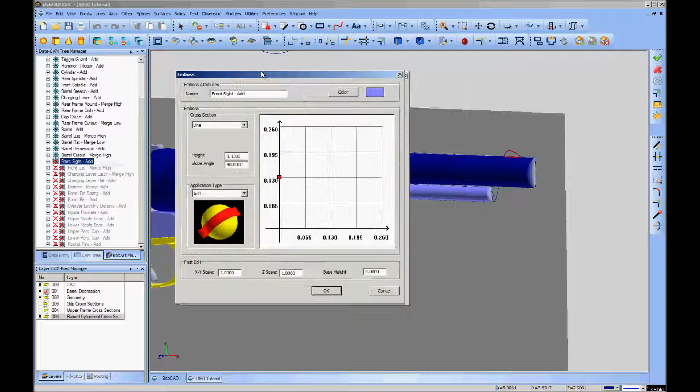This is the front sight. It's a straight line add emboss. I've got a line 0.13 high, 90 degrees, so it's a straight vertical line. I've got my geometry picked, and when we regenerate the model,

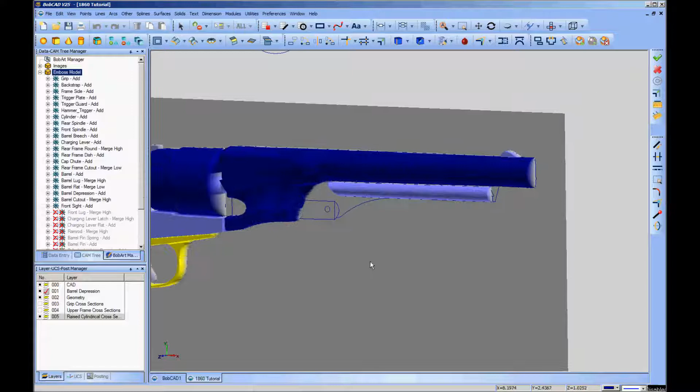you'll get to see what it looks like. One thing I've noticed is that the videos don't really do a very good job of letting you see this. Anytime I move it, they pretty much mess up. So I'm going to blank and then unblank this model, and I'm not going to move for the next few embosses. Hopefully that'll give you a little bit clearer view.

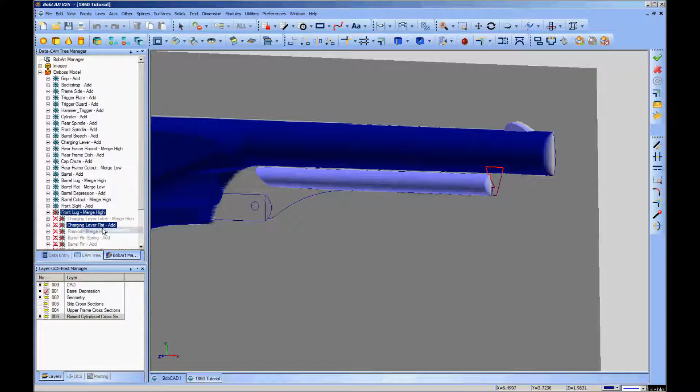So there you see the front sight. Next we're going to do this lug at the bottom of the barrel. I'll unsuppress it, bring it up and edit.

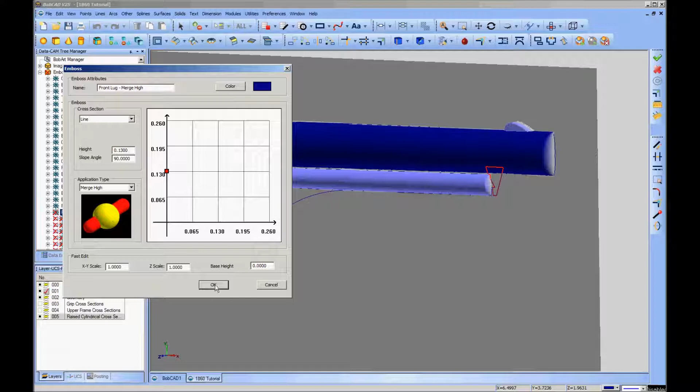It is another straight line emboss, 0.13, 90 degrees. It is set to merge high because it crosses onto this other emboss, as you see. And because of that crossover, if I left it a straight add, it would jump up and give a different surface contour where it impinges on the barrel. So I set it to merge high. Got the color to it, and when we regenerate, you'll see that piece.

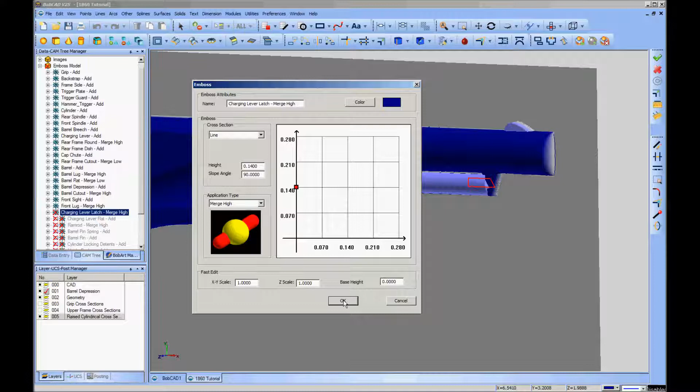Next we've got the latch here for the charging lever. It is another case where it crosses over from where it sits on top of the cylinder here, crosses over to meet the lug. So again, I've got merge high set as my type. This is another straight vertical line, 90 degrees slope, and 0.14 is the height on the line. Regenerating, and we'll see this one. I made a slight difference in height between these two to give a little bit of definition to that.

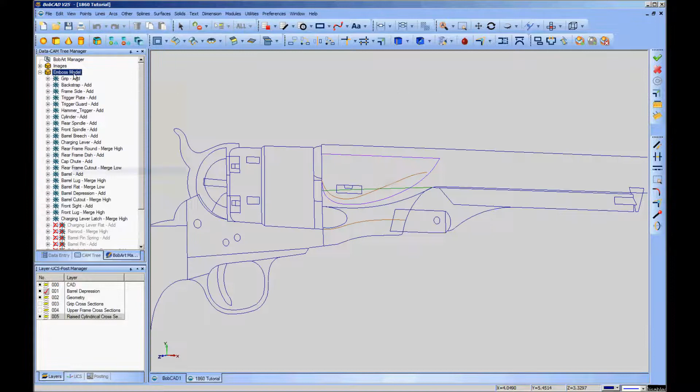Moving back, and I'll blank this so you can see it better. Next we've got this flat part of the forging that comprises the charging lever. We'll unsuppress and show you that it is, once again, and this is the reason that I'm going through these very quickly.

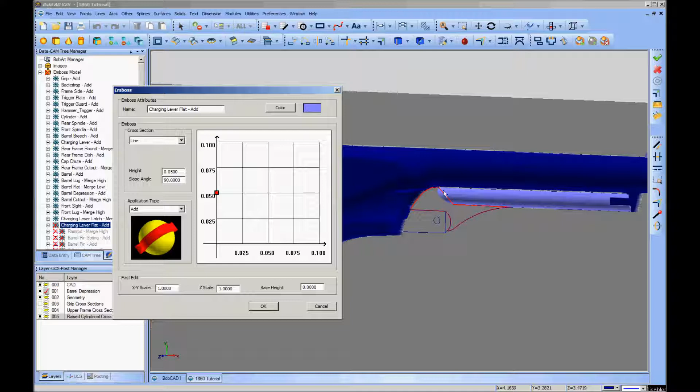These are very simple embosses. If you've gotten this far in the tutorial, these are pretty much no-brainers, and so it's why I'm speeding up here, to save a little time and get these moved on out of the way. This one is 5/100 straight vertical line emboss, just an add because it does not cross over anything else. If this were set to view from straight above, you wouldn't see an impingement there. It doesn't actually cross onto this embossment. So we'll regenerate that.

Now this piece is a cylinder with a rounded end. I didn't do a two-rail sweep as I've done with a lot of the other cylinders because of that rounded end. I would have had to add that on, and I was able to get it all in one shot by using a standard emboss. First I'll unsuppress that, then bring it up.

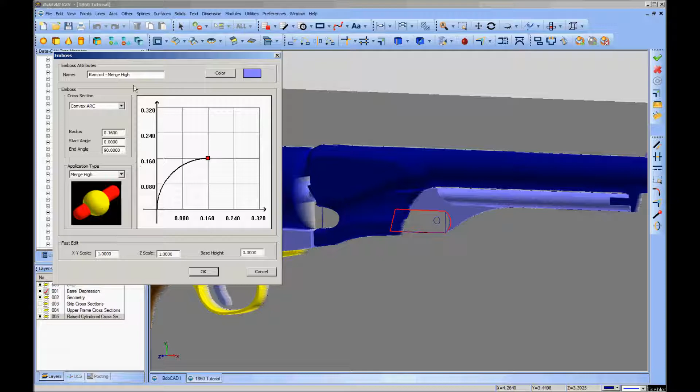A standard emboss with a convex arc, basically a semicircle, 0 to 90 degree angles, and at half of the distance between these two lines is 0.16. So the diameter would be 0.32. Bring that up with a merge high because it does impinge on the barrel lug here, and we can get that all in one shot. I believe I've gone over all the stuff there, so we'll let that be. Regenerate.

And there you see it. Now we'll move back to what, there's really one more feature and then we'll get to the cylinder, and that is the pin. Let me bring this up to the top view.

The barrel latching pin, and again I'll blank and unblank so that it shows up in the video. It's an artifact of the transcoding that's pretty annoying, but we'll try to get around it as best we can. A rectangular pin that goes through a hole in this rod that the cylinder spins on that secures the barrel to the frame assembly. There's a couple of locating pins down here at the bottom, and then the pin there, and that references everything and keeps it locked up tight. So first we've got, let's

Suppress that. We've got a little spring that's part of the pin. That's a retaining spring that once the pin is in keeps it from going anywhere. And on this one we're just doing an additive emboss, just a convex arc with 2/100ths of radius. It's just enough to give it a little definition is all.

I'm not going very much relief on these pins. They just basically have to be there. That all looks good, so we'll go ahead and regenerate that one.

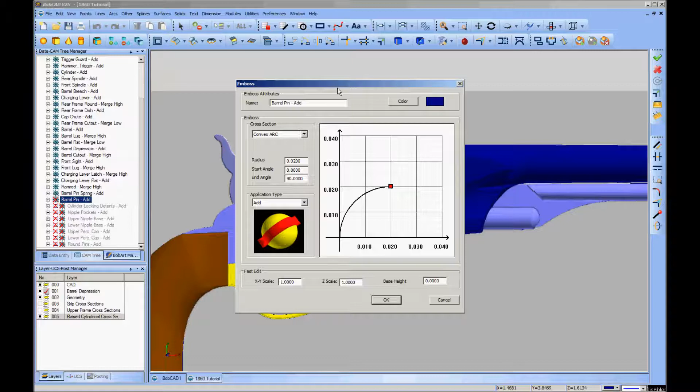And the next part is the actual pin. Unsuppress that and bring it up here. The exact same settings. It's a convex arc with 2/100ths of radius, straight up semicircle. Because these two, here's the little spring, share a line of geometry there, they actually stack one on top of the other, which works to the advantage because that brings the little spring out into some definition once we regenerate.

There you go. Probably difficult to see, but the pin actually protrudes, or the spring actually protrudes just a tad more than the pin. That works to our advantage. It looks pretty nice. Alright, next we have two features that are both indentions into the cylinder here.

The first is the locking detents. Unsuppress those and bring up the edit window. These are vertical line drops. Basically they are 90-degree lines that drop in 5/100ths just straight down. They don't go in toward the axis of the cylinder, which that's too bad, but it's not really that big an issue in this case.

I've got a darker blue selected to show them off, and so we'll go ahead and do these. They are features that at the very bottom here there's a spring-loaded pin that during the cocking action it pops up, engages one of these detents when it's dead center on the bottom, and it locks the cylinder with the chamber directly lined up with the barrel.

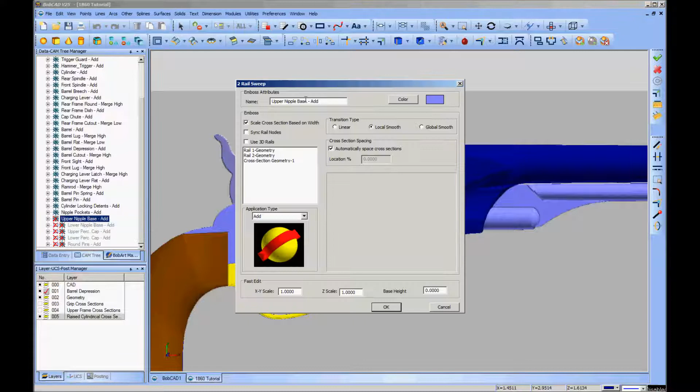Alright, the only things we've got left are the percussion nipples, the percussion caps, and the pins. Because I have to do the percussion nipples as two rail sweeps, I was not able to do multiple features. You saw earlier the feature for the detents got both of these, the feature for these pockets got both of them. On these guys I had to run just one at a time.

So they are basically cylindrical or semi-cylindrical. The cross section is our old standby semicircle. We've got a rail, and then our cross section. And I'm going to go ahead and do both of these features at the same time because it's all really the same thing.

You've got the base of the percussion nipple, then a little bit farther out you see these lines show up, and this is the actual percussion cap, which has a different color. But with both of those unsuppressed, we regenerate, and you see what I've got here. I'll turn this in a moment. You can see that it's actually a semicircle, but that's the next to last features.

Let me unsuppress these other two. And I'm not even going to talk about them because it's the exact same thing, just that the geometry is down here. The last thing we've got is our round pins. We've got one here that attaches the ramrod to the charging lever, and we've got 3 that are in the frame.

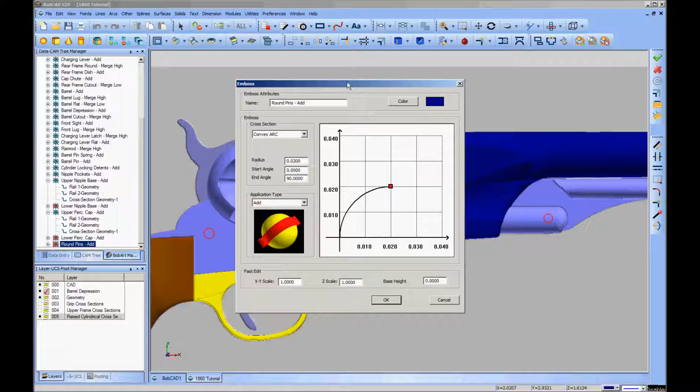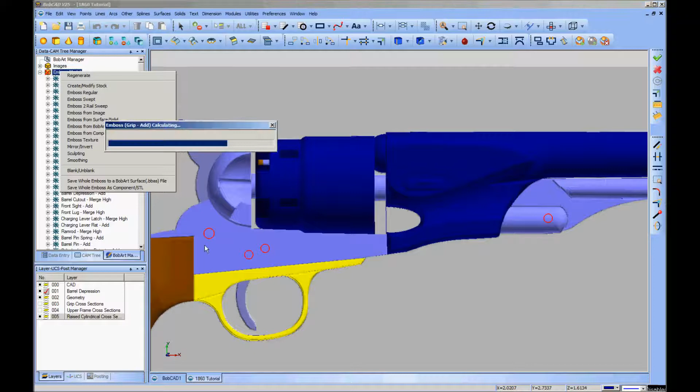On these, I've just got a convex arc, straight additive emboss, 2/100ths of radius, and that's really all there is to it. That's just to give them enough definition to pop up off the frame and to be felt and seen, since they're different colors here. And we will go ahead and regenerate, and there is the entire emboss. Bring it up to a top view, and immediately pull it off of the top view.

I'll drop off the emboss and then unblank it so that you get a good look at it.

Alright, the next thing I'm going to do is bring up a sculpting feature. I'm going to work on the little crease right here. I've got a high spot right back here, and there's also one right there at the edge. I want to fill in a little bit there, and I need to smooth out this handle.

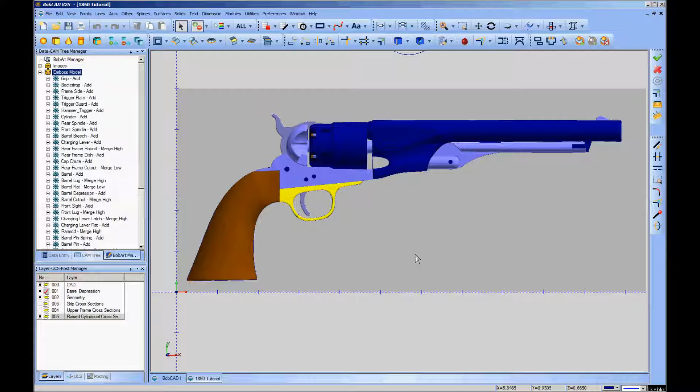So I'm going to use probably 2 to 3 sculpting features. First thing I'm going to do is save the file, and then I'll spend some time on the sculpting features because it's one thing we haven't gotten into at all yet, and it's a marvelously useful feature, but it's also fairly complex and not terribly intuitive.

So we'll start off by deciding where we want the sculpting feature in the tree here. We want it to work on the things we want it to work on and not touch anything else. In this case, I've got the barrel, the lug, the flat, and this indentation all put together right up here, and then down to the cutout, which is this part right here. I don't want this touched, and I don't want either of these parts touched. So right between these two is where I want to put the sculpting feature.

So we'll bring up a sculpting feature and just hit OK. It's right there. Now we drag it up to, yep, there we go. That's between the barrel depression and the barrel cutout. That's exactly where I want it. It'll work on everything before it, but it won't touch anything after it in the tree, and everything right around there is the parts I want to work on.

So we're done with geometry. I'll turn that off. Now at this point, we go ahead and bring the sculpting feature back up by hitting edit.

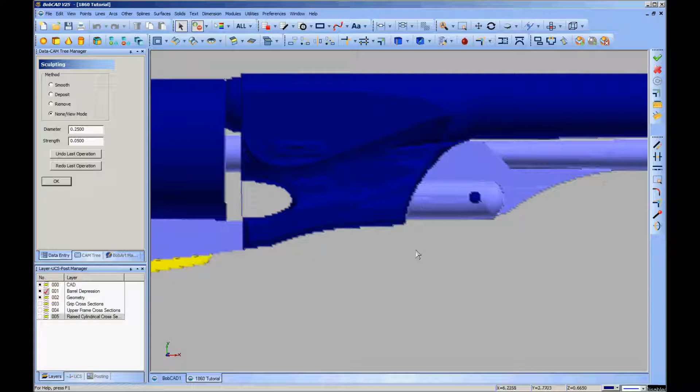First thing you'll notice is that the resolution drops precipitously. Don't know why that is, but it's something that BobCAD does when you bring the sculpting feature up.

Go over the various modes. Smooth is an averaging feature. You've got a low spot right there and a high spot on either side. When you drag your brush across it with smoothing, it tries to average those all together, so it'll lower the highs and raise the lows. You can consider it almost like a file or a grinder, except that it does kind of smush things around too, so it's got some properties of modeling clay or forging to it.

Deposit basically lays down material, and here's the brush, by the way. I'll go ahead and size it. It's set to 1/4 inch. We'll size it down to, say, 3/100ths here. That's about the right size for this.

Deposit will lay down a bit of material here, or basically raise the level of the emboss wherever you ring it. And remove does the exact opposite - it'll dig a trench or put a dimple in where you single click it.

And then it's got a view mode. Diameter is in inches, so the same size brush, if you zoom out, will lay down exactly the same size as when you zoom in. It'll always be 0.03 inches if that's what you've got it set to.

Strength defaults to 0.05. I generally use that as a maximum and back off considerably, down to as low as 0.01, to get a more subtle effect. What we're going to be doing here, if you've ever done any welding and filled a hole with the welder and used a grinder to smooth it out, then added a little more and smoothed it out again, that's exactly what we're doing here.

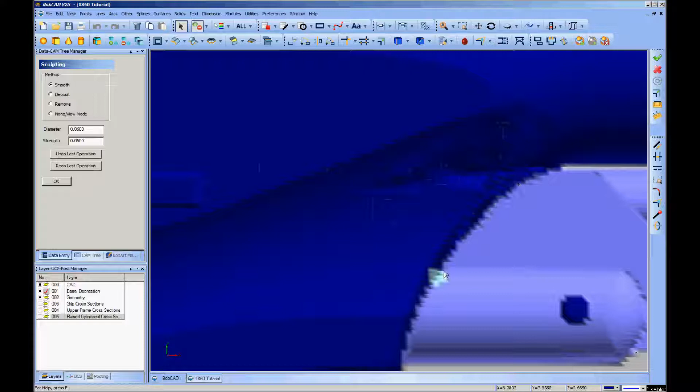You want to try to be careful when you get to the edges of material, because it'll bleed over onto your other emboss. That's one of the reasons that I was so careful to place this sculpting feature before all these embosses, but after these up here. If it bleeds over, then these embosses will just slap down and cover what it bled over, hopefully. That's the theory anyway.

Okay. So you can see that I'm still running more or less along the contours and doing my best to just smooth things down as nicely as I can without affecting the areas that aren't really just immediately adjacent to this.

I've still got a little bit of a pit right there. I'm going to leave my brush size the same, but slack the strength way off. And lay kind of a low flat bead right there. I'll make that 2 of them. Then go back up to smooth, increase my power. And basically smudge all that in there.

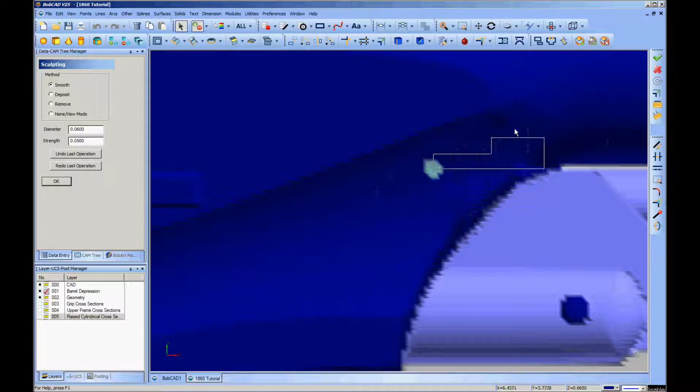If you like to use the analogy of clay and a thumb, that really is closer to what's going on than the welding analogy, but I've got a background in both, and I tend to just kind of mix metaphors and butcher the language all over the place. Okay, I think that's pretty close.

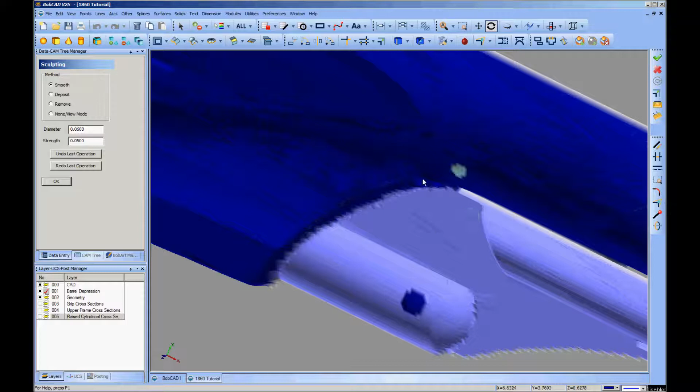I'm going to go ahead and tilt this. It'll make things look pretty bad for you guys, but it lets me see what's going on, then I'll try to bring it together. Right in that area there's a little high spot. Right down there there's a little high spot. I'm going to go back to a top view, and that brings up actually a good point. The sculpting tool only works top down.

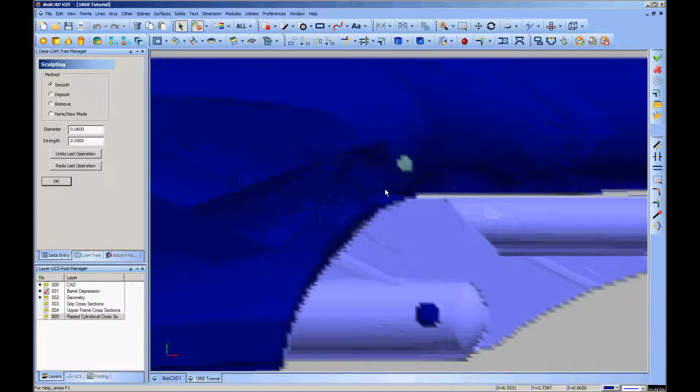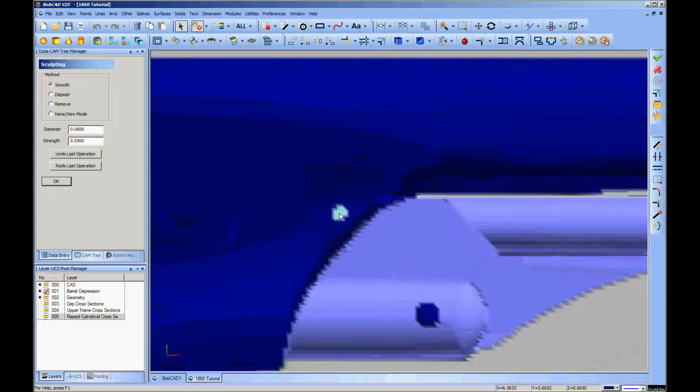It's the only time that your mouse pointer is in agreement with the round cursor there. If you tilt it off to the side, which I'll do, notice how there is no more agreement between my mouse cursor and the pointer. The mouse cursor is way over here, the pointer is way over there, and you just can't get them together. And that can cause real issues, believe me. Found that out the hard way. So always, before you start clicking on anything in sculpting, go to your top view.

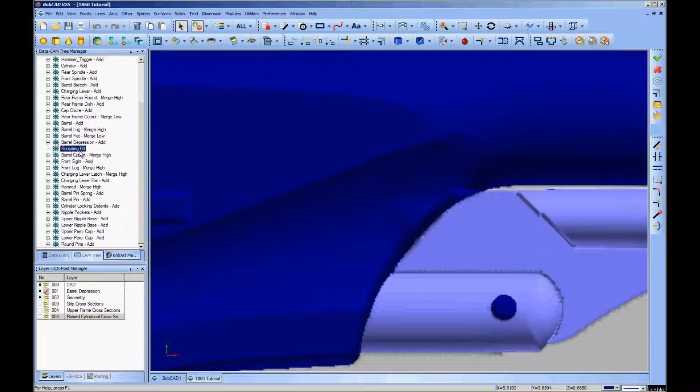First thing I'm going to do is tell that okay, and I'm going to try and give you folks a little bit better view by going back there. Now I'm going to edit my sculpting mode again. Of course that drops the resolution again. I'm going to drop the brush size back down to 0.03 and the strength to 0.03. Bring up my remove tool, and as I said, I've got a little bit of a high spot, a little bit bigger high spot actually, right there.

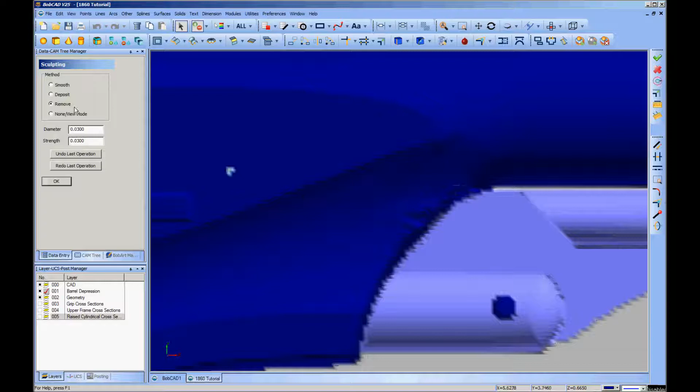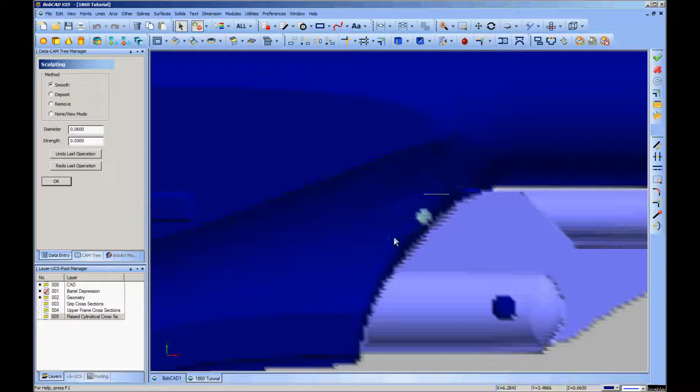So first, I'll just dig a little bit of material out there. I'm going to dig a little bit out right there. And then I'm going to bump my brush size back up and increase my strength. Go to a smoothing tool. Okay. Now, I might work on that a little bit more, but everything that I would do, you've just seen done, so I'm going to move back to a different area with a slightly different problem.

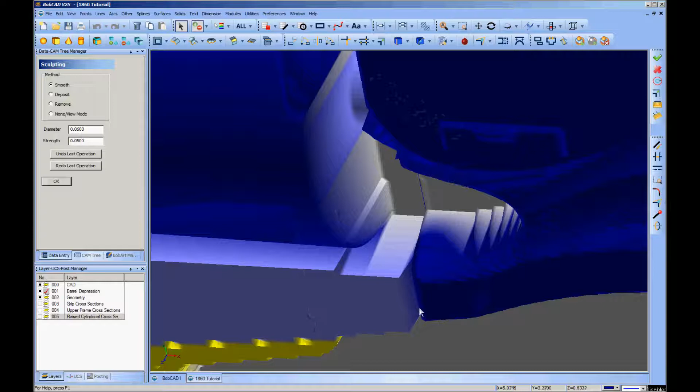It's going to be difficult for you to see. That's probably the best view of it. There's a little flange of basically high ground right there that I think might be a little bit too much for the overall smoothing pass that I'll put at the end. Might not flatten that enough, I think. I've also got a little bit of a valley to try to fill down here. It's not going to be easy to do, and I may have to leave that. So let me bring it back to a top view. I want to bring up my remove tool, drop my brush size, and drop my strength.

In the actual pistol, this is heavily radiused under here, so if I leave a big shadow of material that's been taken out, that's really okay. It'll look alright. So I think that's going to be pretty close. I'm going to increase the size again, increase the strength again, go to smooth, and just round that out as best I can. I don't want to get onto these contours here very much because I want to leave them as defined as possible. I don't really want to get off the reservation much at all there.

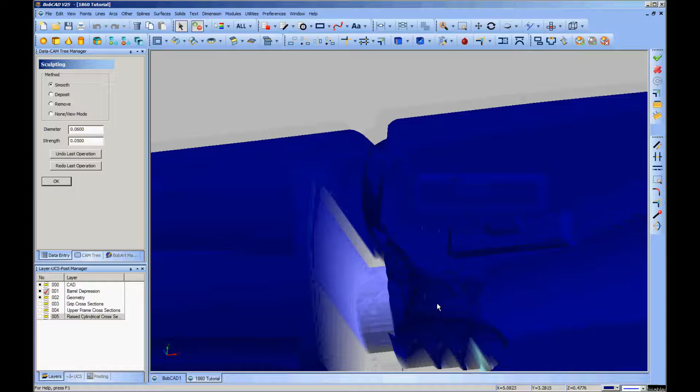Alright, let's see how that looks. Tilt it up. Alright, we've got a little spike there, a little spike down there. Those I think will get taken care of by the smoothing pass. But I'll try one more little hit on them. Alright, I'm on remove. And I'm going to just go to smooth with those settings. And do a little bit of work. Yep, that took care of it. Go back to top view.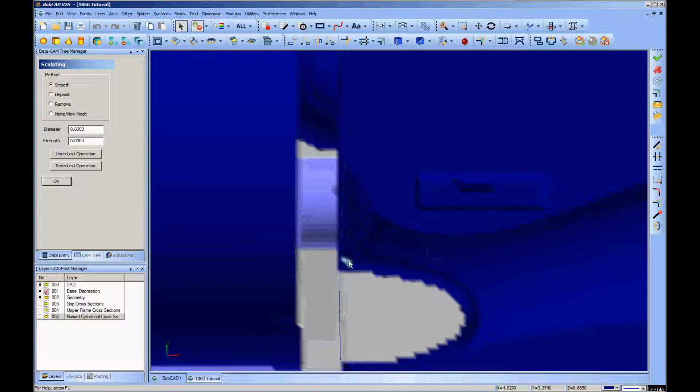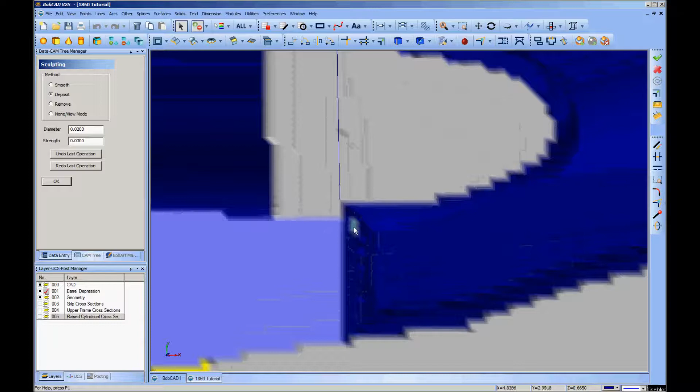Alright, the last minor area I've got is this indent right here. I wanted a rounded edge on the barrel lug, but because I did that as a regular emboss, that also gave me a rounded edge here where they should join up. Clicking over to deposit, I'm going to decrease quite a bit on the brush size and try to get into the valley. It tends to try to drop the material on the nearest flat if it's anywhere close to your cursor. So we'll see how well I can do this. Okay, that's better than I thought I'd be able to do. It's actually not very bad at all.

Go back to top view so I don't get out of whack here. I'm going to drop my brush size even smaller. Make a smoothing pass or two, and then see if I can deposit just a little bit more into this hole.

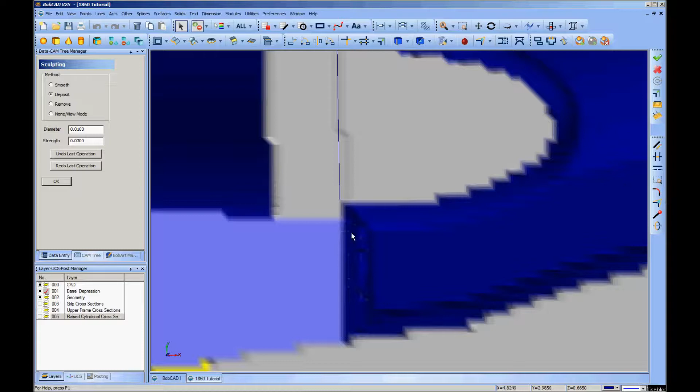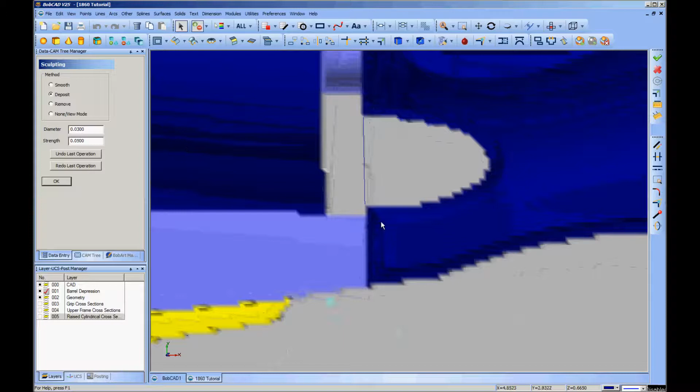Alright, I think I'm probably close to as good as I'm going to get there. I'm going to jack my brush size back up a bit, to say 3. Give myself some power and smooth this a little bit.

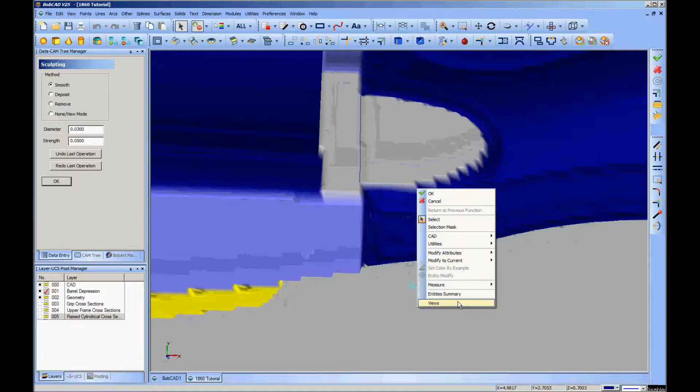Okay. Probably not going to be able to do a whole lot better than that. In a circumstance where that was a real issue, and it might be once I've got this on the machine getting ready to cut it, you could always go back in and just make a little small square feature that would fit in there and would fill that. And not really very difficult to do, not very conceptually challenging, so I'm not going to bother with it right now.

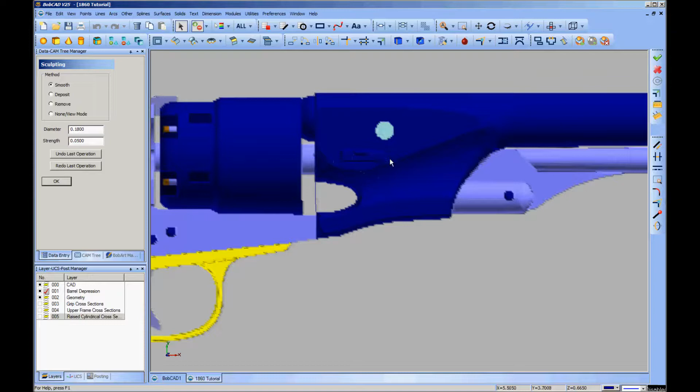I've got one more big smoothing thing to do. Gonna give myself a pretty good sized brush. And we'll go a little bit bigger actually. I'm gonna soften these lines just a little bit. Gonna have to be careful to stay off of the pins here, but bring this down. And I'm just going to move right along the contour.

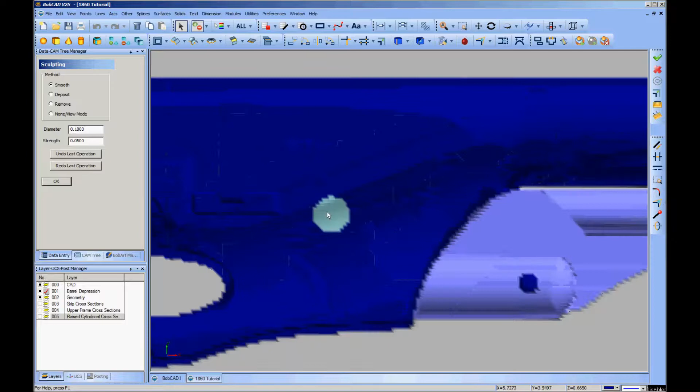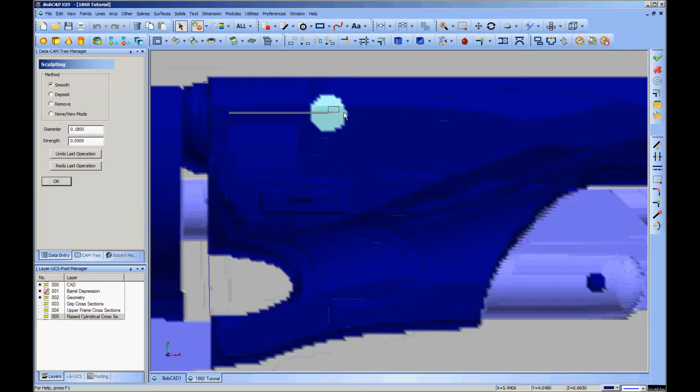That's probably fine on the lower one, except this area in here could stand a little love. I'm just gonna kind of brush that out a little bit. I'm going to do the same thing along the top here, just one quick pass. I am going to fade it out a little bit up front here because it really did lose a lot of definition on the actual image. You could barely tell where the line went when it got to the forward part, the top line at least.

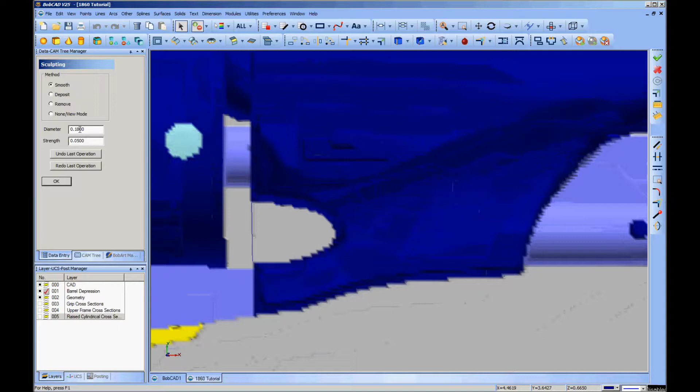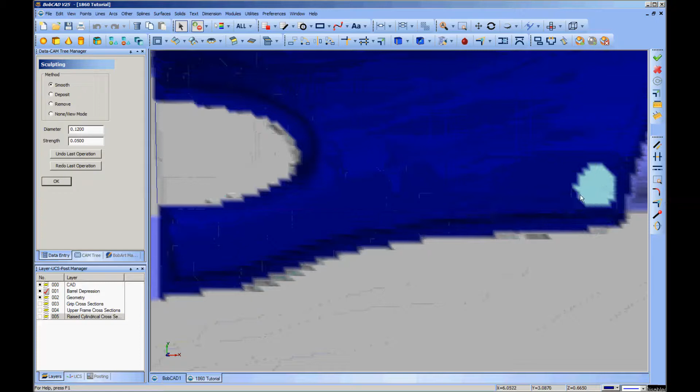And I'm going to step down just a little bit in size, and I'm going to do the same with this bottom chamfer. Going to just wipe all around. Maybe do it twice on this very bottom feature. And then a quick pass across there. Okay. I'm going to call that barrel substantially done.

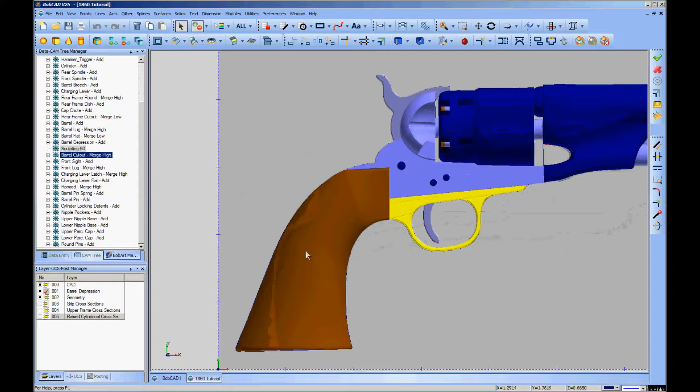I'm just going to use the same sculpting pass because there's really only one other thing on the whole piece that I want to do, and that is blend this line in a little bit. So we'll bring the sculpting feature back up. I've got a 1/8 inch full power smooth, so I'm going to go across contour here to just kind of rub this line right out.

And if you're wondering what those little rectangular artifacts on the screen are, so am I. I think they're a little borderline glitch; it's just visual as far as I know. It doesn't indicate that anything's going to crash. They just pop up when they want to and then leave you high and dry.

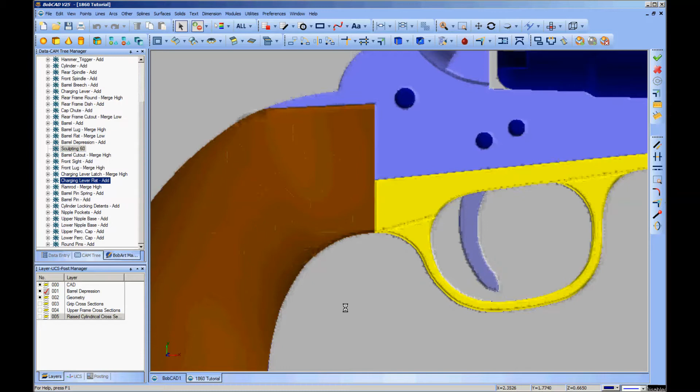And that is one quick step away from being finished. I want to really increase the size of this and do it one more time. Okay. Now there's two last things to do. First of all, I'm going to blank the model and unblank it to give you a nice look on the video. I'm going to add a smoothing pass. This is an overall smoothing. It'll smooth the entire model. I'll do OK.

And I'm going to go to Create Modify Stock. And I'm going to increase the resolution to 300. That's 300 triangles per inch. 200 is enough detail to let you do pretty fine work, but it doesn't take forever to regenerate. 300 brings it up to the point where it takes quite a bit of time to regenerate the model. So you really want to save that for your last. All I've added is one smoothing pass, so we'll hit regenerate.

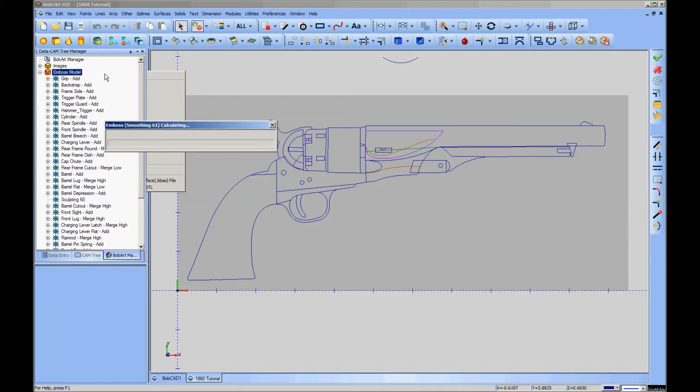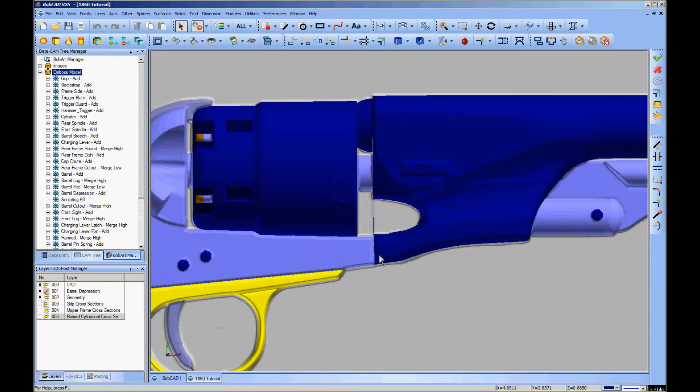And with just a little luck, we'll have a very nice looking model that has only one or two small issues, and hopefully I've pointed out all of them. The major one being that there's a little bit of a gap right there where the frame meets the barrel lug. Add one little emboss and you can have that fixed. There are a few places where I took shortcuts, but overall, I'll bring this in and let you see some of the features and see what the smoothing pass did.

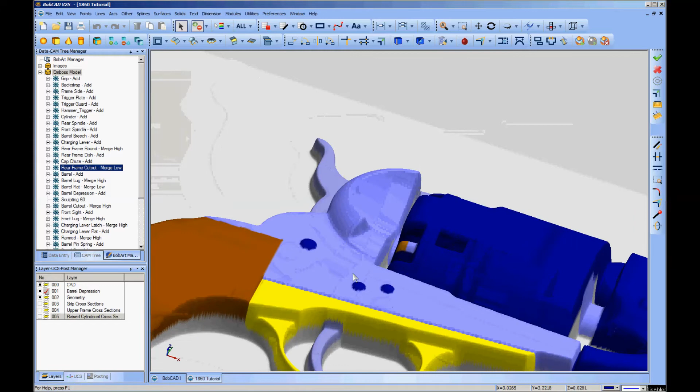Let me blank it and unblank it real quick. You remember that I had lots of little jaggies here and that this transition didn't look very great. It's much, much nicer now. Of course, I'll move it and blur it out for you. Overall, everything has been just refined a bit between the increase in resolution and the smoothing pass. But right there you have one high relief embossment of a Colt Model 1860 Army Revolver.

And I hope you've enjoyed this tutorial. I know it's been a long one. In real time, this takes less time than when you're pointing out every detail of every embossment and talking and losing your place and going through the motions that I'm going through. I think I took about maybe 2.5 to 3 hours to do this the first time around. And it gets faster the more you work on something.